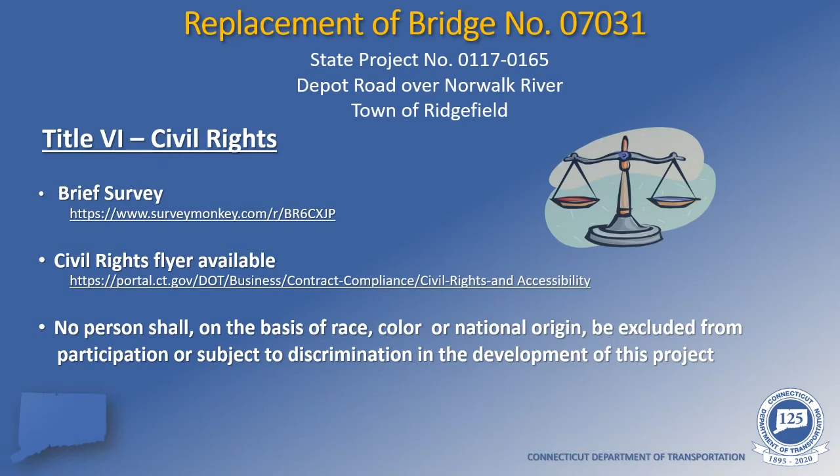I would now like to explain how this project is being funded. This bridge is a town-owned bridge and is being funded under the department's federal local bridge program. Traditionally in this program, the town selects a designer, and because federal funds are involved, the department provides administrative oversight because the department is considered to be stewards of those federal funds. The funding is traditionally 80% federal and 20% town for the design, rights-of-way, and construction phases of the project.

However, this project is going to be funded under the department's DMS, or Design Managed by the State program. In this program, it will be the department who will be performing the design on behalf of the municipality, utilizing our consultant liaison engineers, who in this case are Close, Jensen, and Miller. Close, Jensen, and Miller has completed the 30% preliminary design, and it will be brought to final design completion by one of our pre-selected task-based designers.

In addition, the design phase only will now be funded with 80% federal and 20% state funds, so the entire design phase is at zero cost to the town of Ridgefield. Although the preliminary design was completed by the department, it was in full partnership and coordination with the town of Ridgefield. We held several meetings with the town and diligently worked together to incorporate most of the town's comments and concerns, and now we are reaching out to you, the community, to also weigh in.

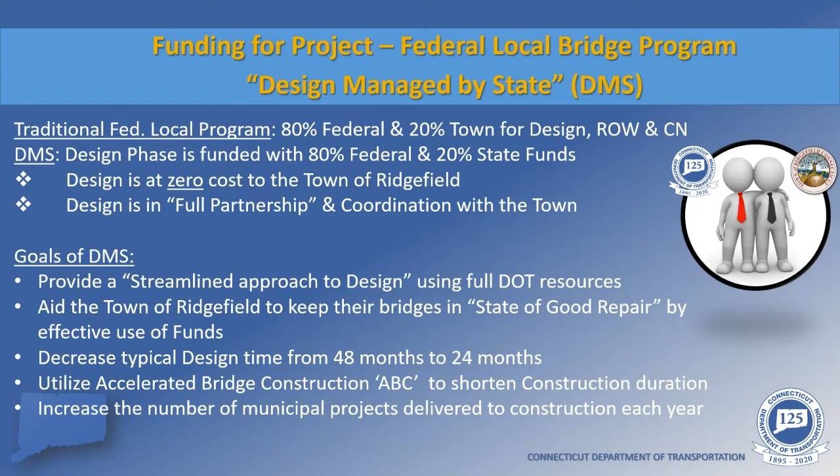The DMS program is spending your municipal and state tax dollars both efficiently and effectively, and at the same time fostering a great working relationship with our municipal partners. And with that, I would now like to hand it over to Mr. Rudy Marconi, First Selectman for the town of Ridgefield.

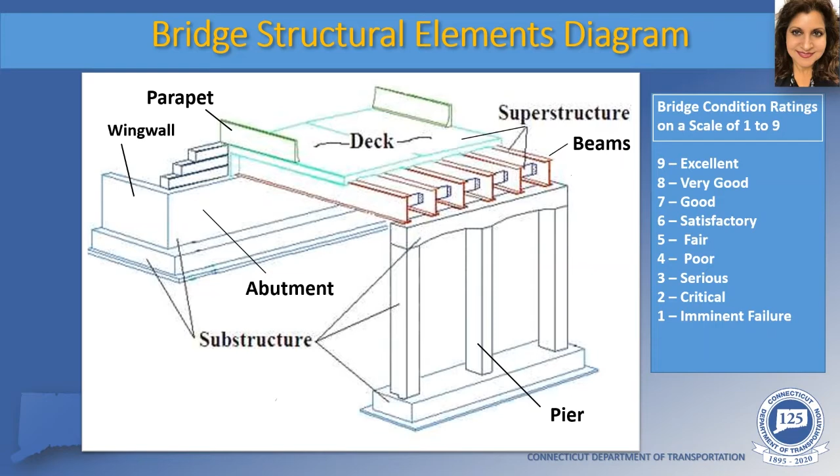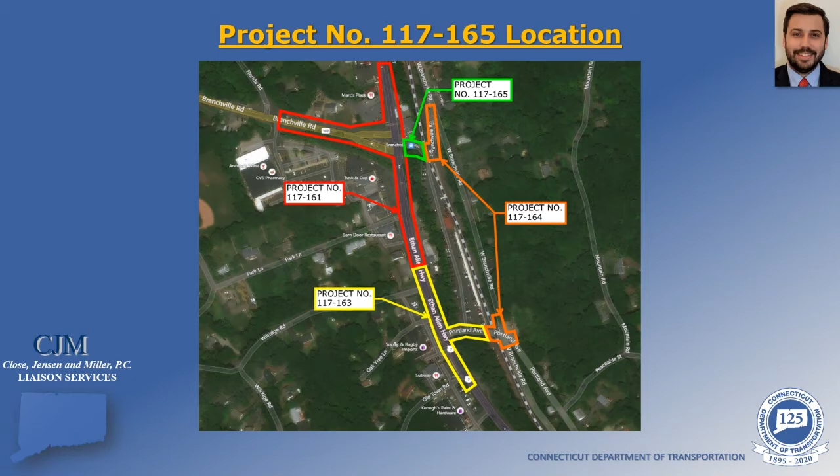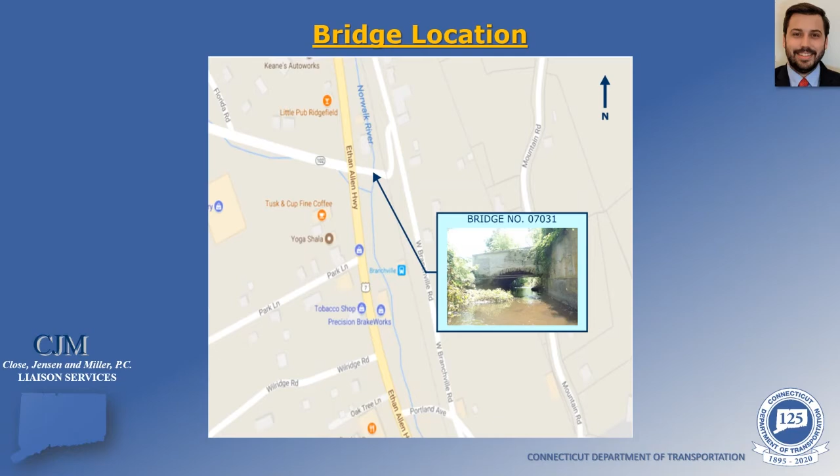Project number 117-165 involves bridge number 7031, Depot Road over the Norwalk River. The bridge provides access from the Route 7 Route 102 intersection to the Branchville Station parking lot and properties across the Metro-North Railroad tracks on West Branchville Road. Here's an aerial view of the site. As you can see, this is a very developed commercial area in the Branchville section of Ridgefield. The intersection with Route 7 and Route 102 is located to the west of the bridge. On the east approach, there's the parking lot entrance to the Branchville station, and then continuing east along Depot Road, there's the Metro-North Railroad tracks.

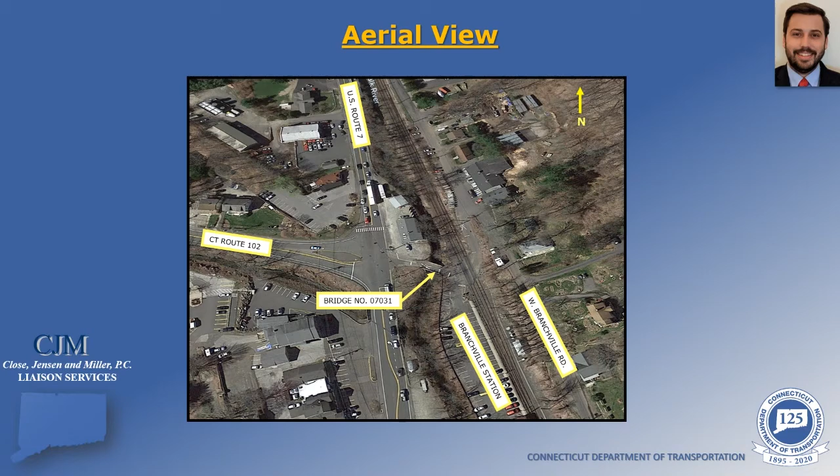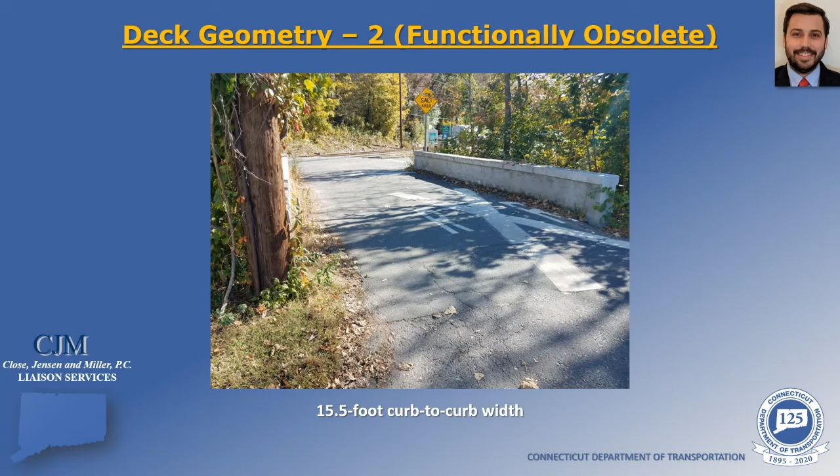The existing bridge was originally built in 1910 and consists of a dry-laid stone masonry arch that supports fill and a reinforced concrete slab. The structure is about 20 feet long and has a 15.5-foot curb-to-curb width. The bridge has pavement markings for 2 lanes, but it normally functions as an alternating 1-lane bridge. However, the bridge has been closed to vehicular traffic due to its deteriorated condition. Because of the existing 15.5-foot curb-to-curb width, the bridge is too narrow for its current average daily traffic. This means the bridge is functionally obsolete and eligible for replacement on the federal local bridge program. The bridge is also eligible for full replacement based on the superstructure condition.

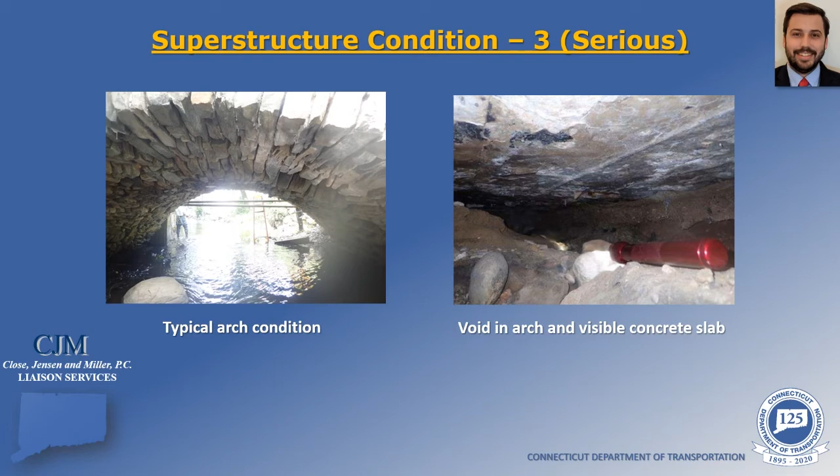The superstructure is in serious condition overall with a rating of 3. The stone masonry arch exhibits some large voids, with the largest being 5 feet long by 3 feet wide by 3 feet deep. Fill has been lost through the voids to expose about 80 square feet of the concrete deck. The deck itself exhibits spalls up to 12 inches in diameter and punky concrete throughout. On the slide, the picture on the right shows the inside of one of the voids. Due to this superstructure condition, the bridge has been closed to live traffic. The existing substructure is in satisfactory condition overall, with a rating of 6. The northeast concrete retaining wall exhibits light to moderate scaling with some cracks, and the stone masonry wing walls at the other 3 corners of the bridge exhibit minor voids and some settling.

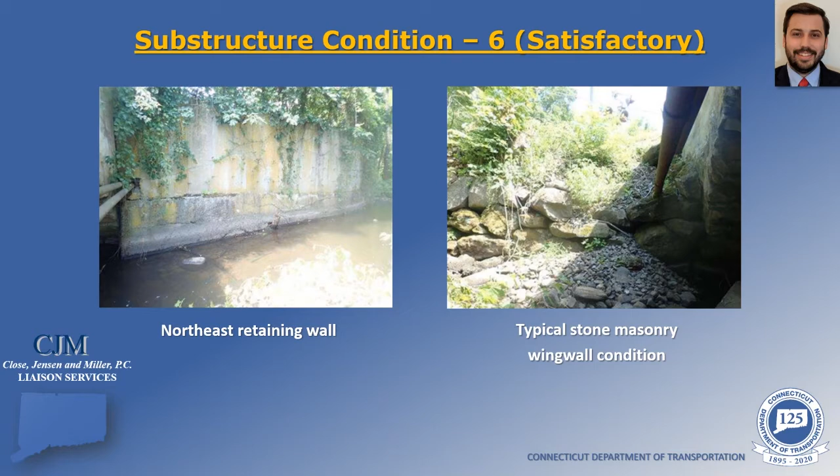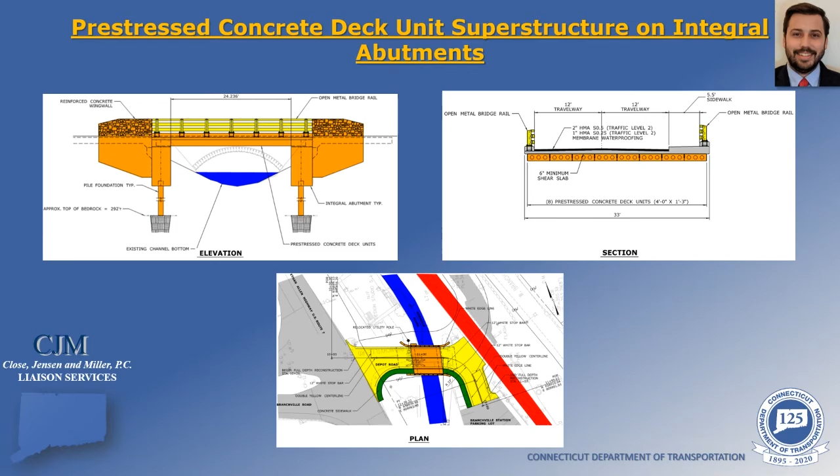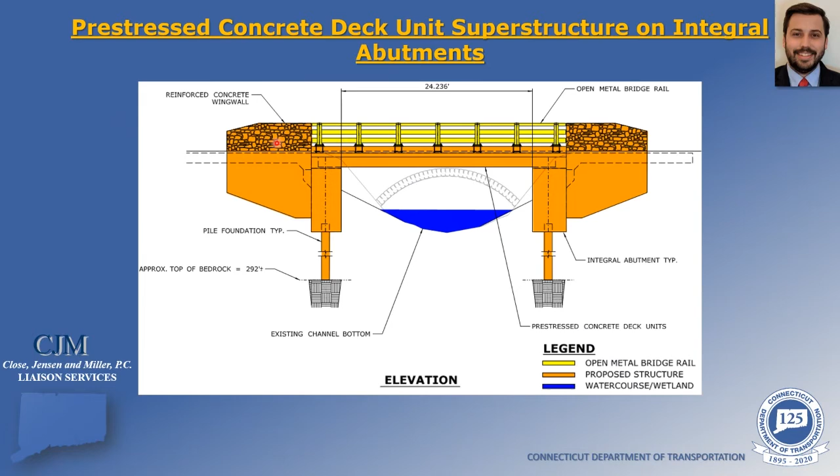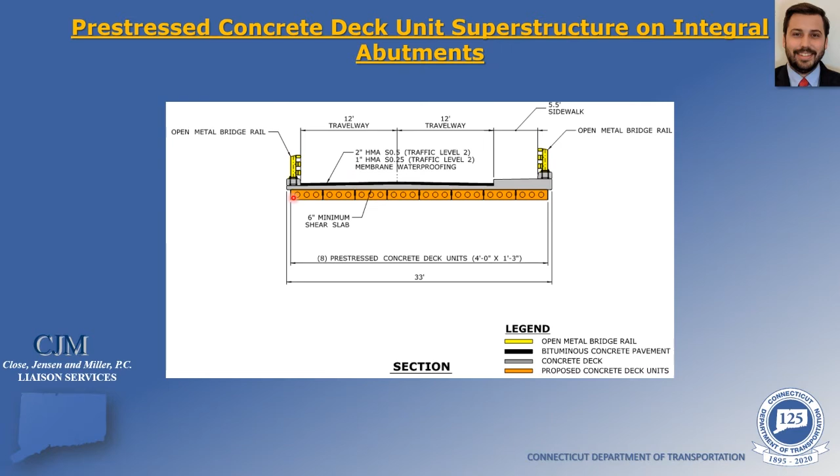Here's a cross-section cut of the proposed bridge. On top in yellow is the open metal bridge rail. The new roadway bituminous concrete pavement is shown as the black area. The curb-to-curb width will be increased from 15.5 feet to 24 feet and provide a 10-foot lane and 2-foot shoulder in each direction. The overall bridge width will also be increased to accommodate a new concrete sidewalk, shown here to the right of the roadway. On the bottom in orange are the pre-stressed concrete deck units.

Here are some pictures from recent projects to show what the proposed superstructure could look like. The top picture is an example of open metal bridge rail on top of a pre-stressed concrete deck unit superstructure. The bottom picture is an example of the open metal bridge rail shown from the roadway.

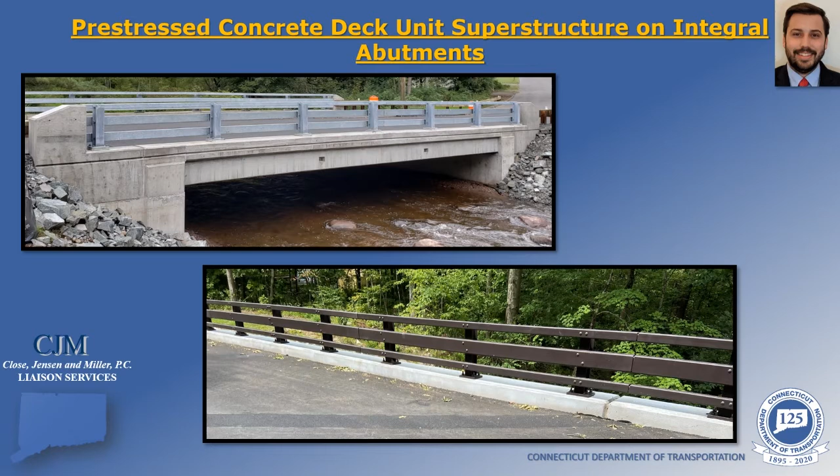Here's a plan view of the site. Looking down over the river, you can see the bridge in the center in orange. On both sides of the bridge in yellow, the roadway will be widened and reconstructed. In green along the roadway is the proposed concrete sidewalk, which will provide access from the Route 7, Route 102 intersection to Branchville Station and the Depot Road Railroad at-grade crossing. The station is located to the lower right of the picture, and the railroad tracks can be seen to the right in red.

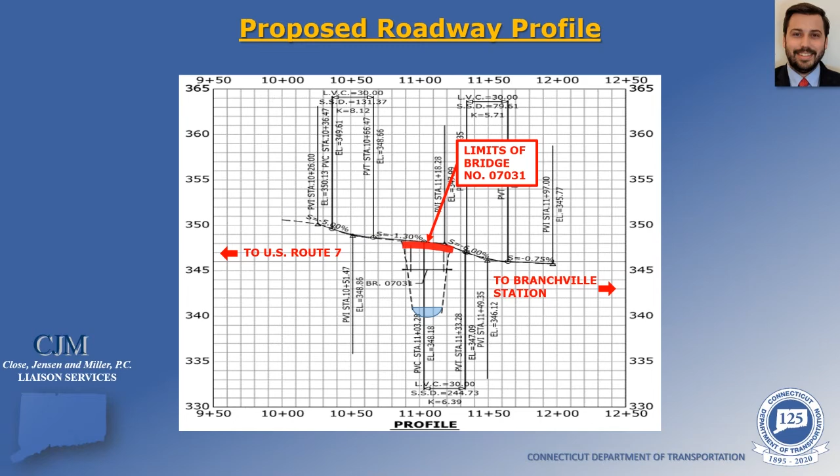Construction will require a detour. Since the bridge is already closed, the existing detour will be utilized. Branchville Station and West Branchville Road will continue to be accessible by Portland Avenue, which is located 0.2 miles south of Depot Road. The Depot Road Railroad crossing will also continue to remain open to vehicles for this project.

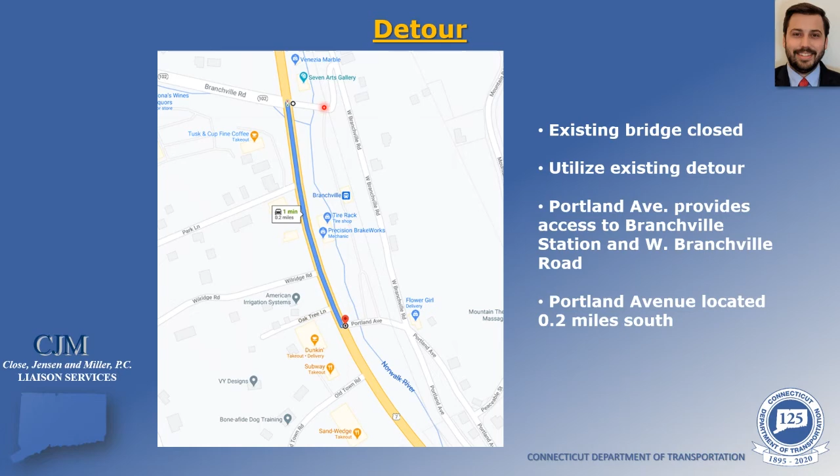We must obtain all environmental permits for this project. We currently anticipate a Ridgefield Inland Wetlands permit, a U.S. Army Corps of Engineers general permit, and a Connecticut DOT flood management certification.

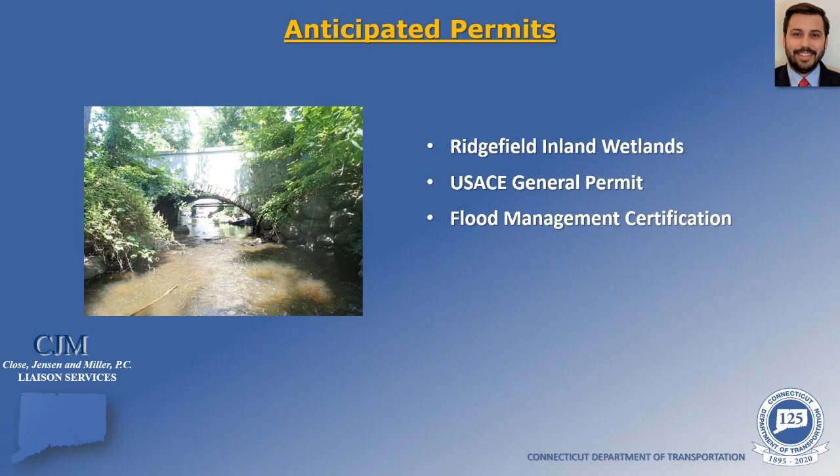The proposed construction duration is 4 months with an anticipated start of spring 2023. Spring 2023 is a conservative estimate due to the time required to obtain the anticipated permits. However, the permit requirements and durations could change, and there is potential the project could start as early as summer 2022. The construction will be funded by 80% federal and 20% municipal funds. The estimated construction cost is $2,210,000 with a municipal share of $442,000.

This concludes the technical portion of tonight's presentation. I will now turn it over to Dennis McDonald from DOT Rights of Way.

Good evening, everyone. My name is Dennis McDonald, and I'm a representative from the Connecticut Department of Transportation, Division of Rights-of-Way. I'm just going to provide a brief overview of the right-of-way process. So the function of the Division of Rights-of-Way is to acquire all property and property rights necessary for the project. This is done in accordance with Connecticut General Statute Section 13a-73, 13a-98e, and the Uniform Relocation Assistance and Real Property Acquisition Policies Act of 1970 as amended.

The typical right-of-way impacts include partial acquisitions, easements, and rights. Impacts are subject to change as the design progresses, but this gives a general idea of typical property impacts. Once property impacts have been established, each impacted property owner will receive a letter of intent to acquire along with a property acquisition map. The letter essentially initiates the right-of-way process, and the map provides a detailed overview of the specific right-of-way impacts. Soon after the letter is received, the evaluation process will take place, and once a value has been established, each impacted property owner will receive a written offer of compensation.

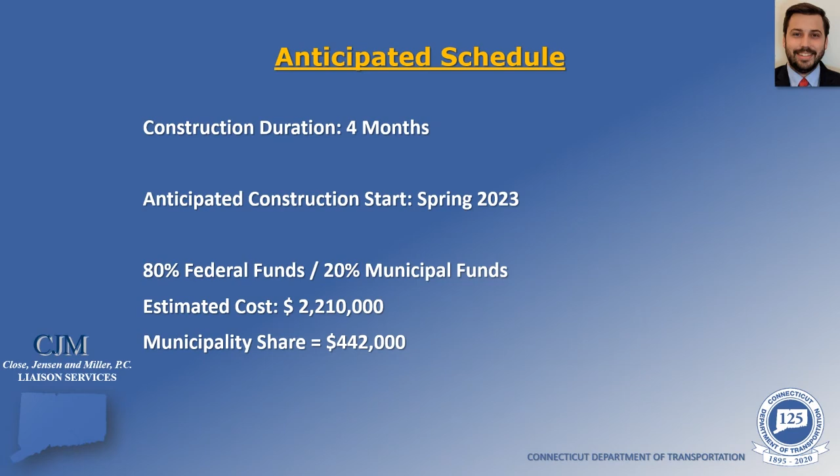All right, let's take the next question. How long will construction take? Can it be expedited? Dan, will you please take this question? Yep. So right now we anticipate construction will take approximately 4 months. This 4 months is already expedited time. This is because we are using accelerated construction techniques like precast beams, and we are detouring during construction, which would help shorten the construction duration. Okay, thank you.

Next question. Can stage construction be used instead? Dan, can you please take this question? We did look into doing some sort of stage construction. However, because the bridge is already so narrow and it's not in very good condition, construction staging is not feasible at this site. And in addition to that, we wanted to avoid construction staging, which would add a lot of time to the construction duration. Okay.

We have another question. Who will choose the stone facing? Dan, would you like to start with this question? And if the town would like to add, they're also welcome to add. Yeah, I'll start off by just saying we are currently proposing stone masonry facing to cover some of the exposed concrete portions of the bridge.

For most of our projects, we do include special provisions in the contract documents that dictate the type of stone that can be used. Usually the type of stone and the pattern, we make sure it's locally sourced from the project area and that it's approved by the town. And then typically on these projects, a town representative will be provided a sample during construction to have one final review, and then to confirm the stone pattern and type in the field just prior to installation.

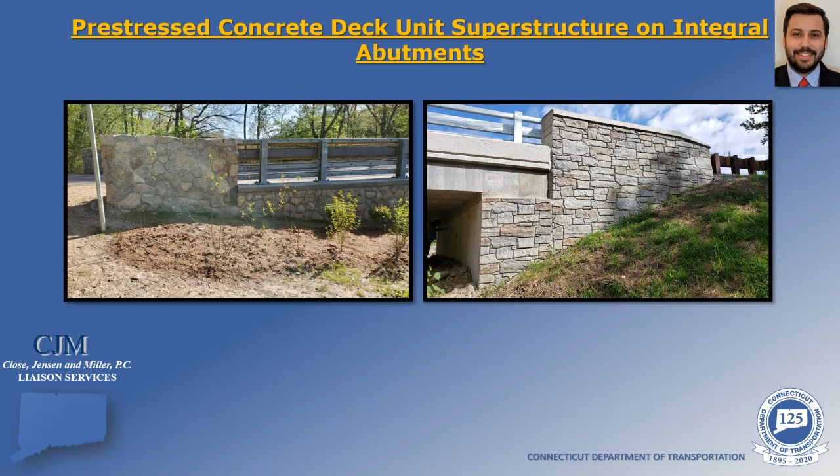Okay. Would the town like to add anything else? Charlie, if you're on. Yeah, Charlie Fisher talking. The actual decision will be made by the Office of the First Selectman. Like other projects, we want to maintain the existing aesthetic appeal of the old bridge, so the type of stone and the pattern will be mimicked in this new bridge. Okay, thank you very much, Dan and Charlie.

Ladies and gentlemen, it doesn't look like we have any more questions. Hold on. Okay, we have one more. Let me say it. We are supposed to use the stone from the existing bridge.

I think that's a question. Are we supposed to use the stone from the existing bridge? Dan, would you like to take this question?

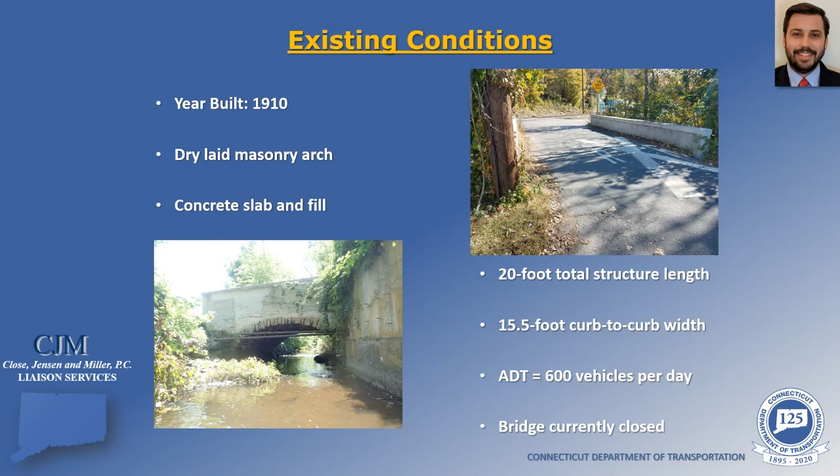Yeah, so sometimes if the stone is in good condition, we can have a contractor maintain that stone and use it on the bridge. However, in this case, I'm not sure how much stone is left to cover all the end walls. So ultimately we still might have to get additional stone masonry from a local quarry or from the surrounding area to supplement any stones that are on the existing bridge.

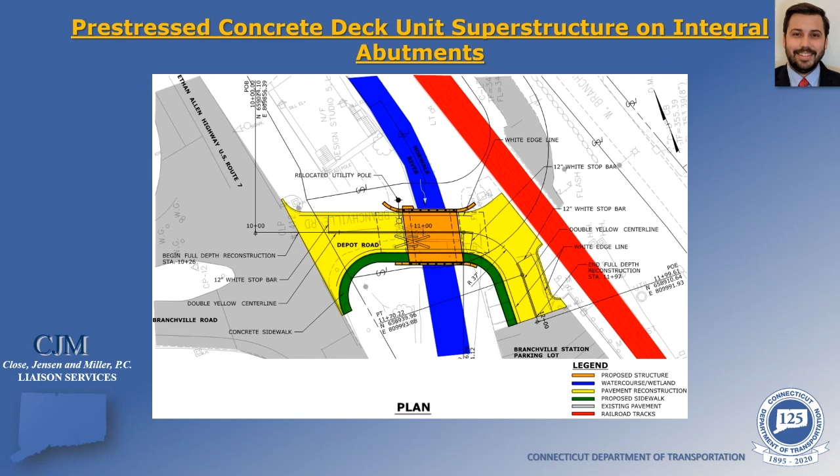All right. Are there any more questions? I don't see any. Sometimes they pop in at the last minute when we're ready to close, but I don't see any other questions, ladies and gentlemen. So I think this is it.